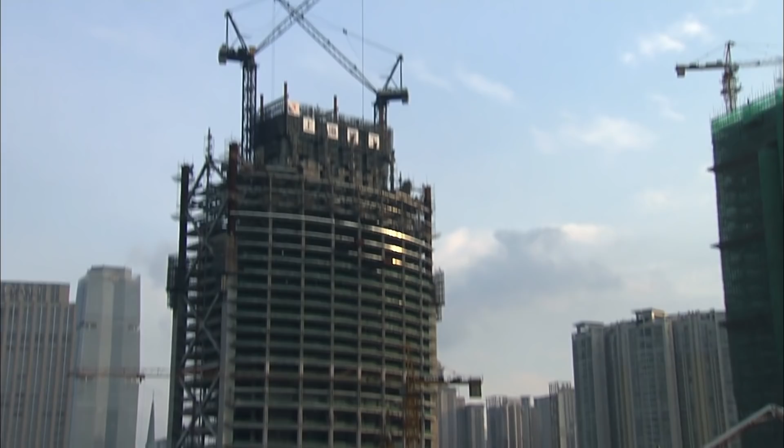In one of the world's most polluted countries rises a 71-story antidote: a tower designed to conserve energy, harness the wind and sun, and generate as much power as it uses. The builders call the Pearl River Tower the world's greenest skyscraper. If they succeed, they'll write the blueprint for the buildings of tomorrow. If they fail, they'll leave a towering mistake.

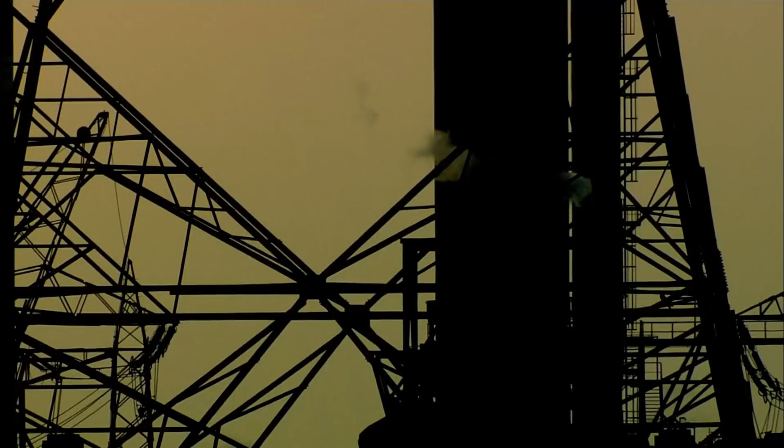Today, as oil reserves dry up, engineers and scientists are inventing other ways to power our cities: solar, geothermal energy, fusion, wind, and buildings that redefine the skyscraper. A new era of ecological engineering has arrived.

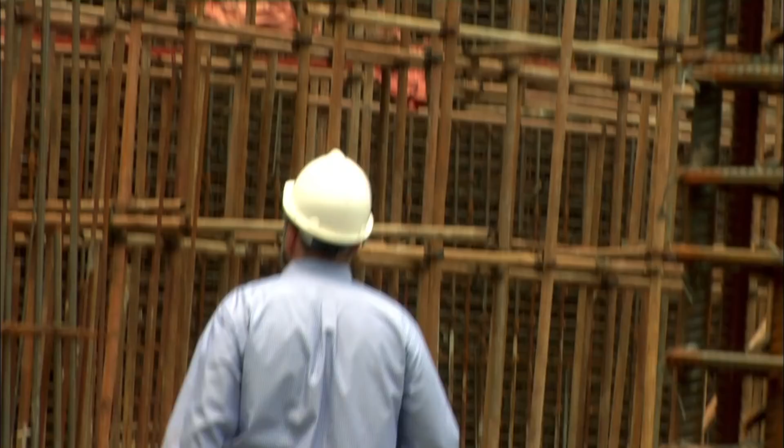40% of the world's energy goes into buildings for lighting, cooking, heating, and air conditioning, functions that not only gobble energy but release greenhouse gases. Architects are billing the Pearl River Tower as a giant antidote. At 71 stories, it will become the second tallest building in the city of Guangzhou, in the southeast of China.

The tower is just one of many buildings under construction. A city hungry for development, Guangzhou typifies modern China, a place pressed for time.

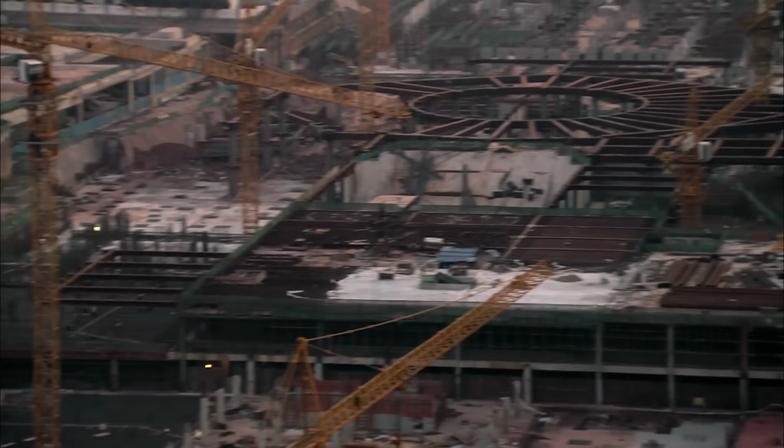The Pearl River Tower is part of the future Central Business District. When complete, it will take pride of place in this booming metropolis. For now, this whole area is a huge building site. All the work must be finished by 2010, when Guangzhou will host the Asian Games.

China intends the Pearl River Tower as a sign that the world's most polluting nation is starting to clean up its act. To build this ecological high-rise, four players have a key role.

Roger Frechette is the engineer in charge. He specializes in clean energy for buildings. If this ambitious project meets its goals, it will be Roger's greatest success. It's also his greatest risk.

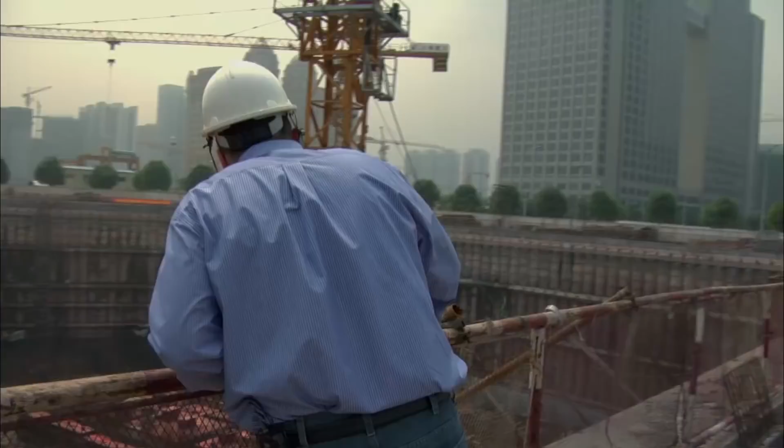It's really a very critical time in the history of the construction industry. The problems that the world sees right now with global warming and shortages of energy are forcing us to rethink how we design buildings and how we build buildings.

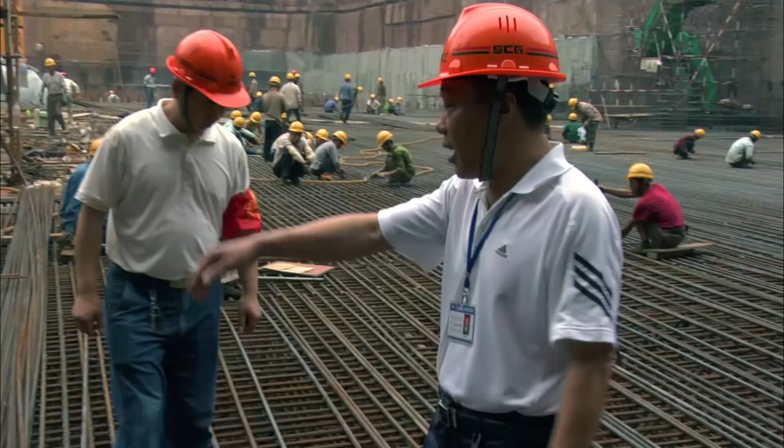Pan Xuanzhu and Xu Chaoshang work for the Shanghai Construction Group. They're in charge of every stage of the work and hundreds of Chinese workers. Whatever happens, they must stick to the tight construction schedule.

I've been doing this kind of work for 20 years. This is the biggest site I've worked on in my entire career.

It's also the boldest. The technology is new and untested. It's the first time that I've taken part in the construction of an ecological high-rise. There are a lot of difficulties and technical problems during the construction. For me, it's a huge challenge to manage the whole of the site.

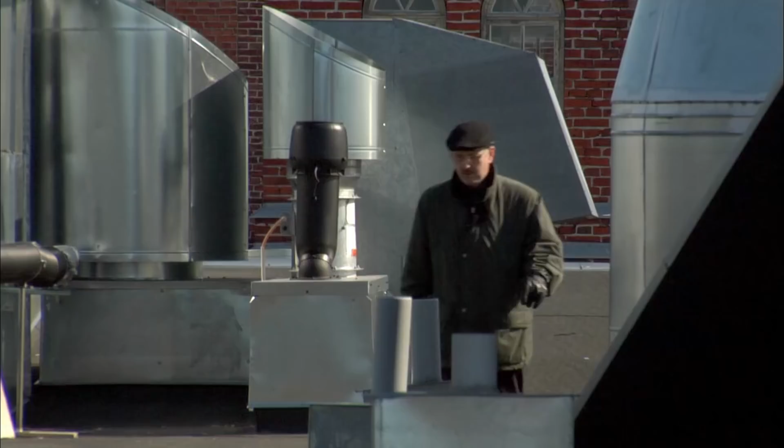And finally, standing by in Finland, Risto Joutsiniemi is far from the building site, but close to the project. He's the brains behind the huge wind turbines that are key to powering the Pearl River Tower. It is my dream to get the Earth going without polluting it, only make it really green.

Together, this international team of eco-engineers faces the challenge of a lifetime. The deadline is fixed. Whatever problems arise, they have 2.5 years to transform this hole into the world's most ecological skyscraper.

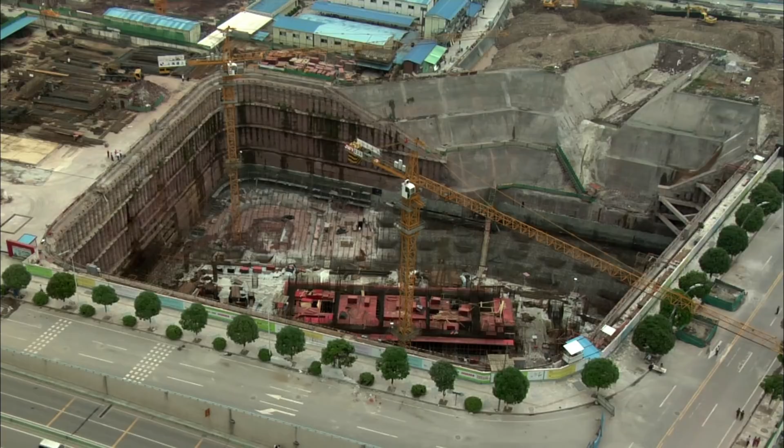Roger's firm, Skidmore, Owings & Merrill, knows all about building skyscrapers. In the past 70 years, they've completed more than 10,000 projects in more than 50 countries, but nothing like this: a building that taps the wind and the sun to produce as much energy as it uses, a building that curbs pollution instead of creating it.

Buildings may seem inoffensive, but Roger knows they're a huge source of greenhouse gases. When we think about the problems of global warming and carbon emissions, most people think about cars and buses and transportation and factories. But the reality of it is that there's more carbon emissions that come from office buildings and residential buildings than from those other sectors.

Well, in this decade, China will become the largest user of fossil fuels on the planet. But for the first time, China is realizing that their own natural resources are limited, and they need to find ways to reduce the amount of energy that they consume. So how people use buildings, how people survive within buildings is going to be very important to our future.

Roger is making his first visit to the construction site, where work will hum for the next 2.5 years. On this spot, his dream will come to life: a revolutionary skyscraper, integrated into its environment to tap clean energy.

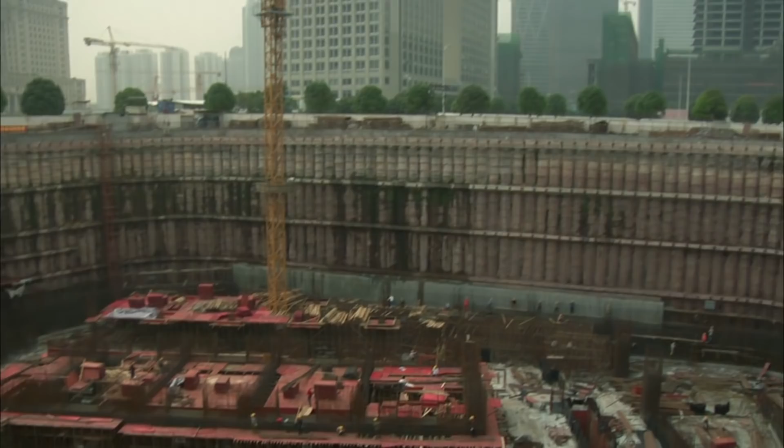Site of the Pearl River Tower. Off to the right here is the hole. Right now, the project is still well below grade. The hole is about 28 meters deep. When the project is complete, it'll rise roughly 309 meters into the air. To put that into perspective, this building off to my right is roughly 100 meters tall, so our project will be roughly 3 times that height.

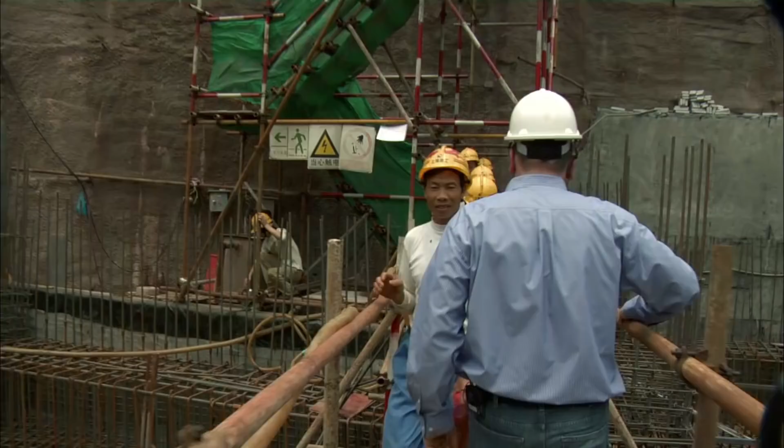Throughout construction, Roger will have to negotiate a slew of challenges: unforeseen setbacks, new techniques, cultural differences, and diplomatic solutions. Above all, looms an unyielding deadline.

The tower also has to guard against unseen forces. China is one of the world's most earthquake-prone countries, and Guangzhou itself lies near a major fault zone. For the tower, protection starts at the bottom. The tower is designed to withstand a quake measuring 6 on the Richter scale, almost as bad as the 1994 quake that rocked Northridge, California.

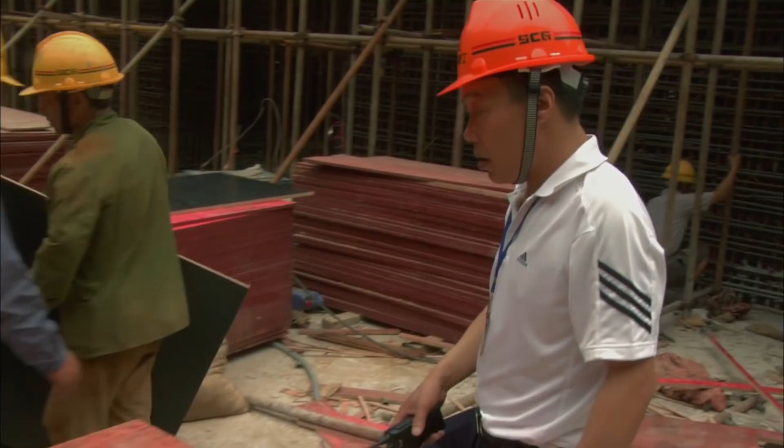Erecting the vital foundations is just one of 1,000 burdens for Pan Xuanzhu, the site's foreman. He supervises an army of welders, steelworkers, and crane operators. Pan Xuanzhu is the tower's linchpin, the link between the engineers in their offices and the teams on site.

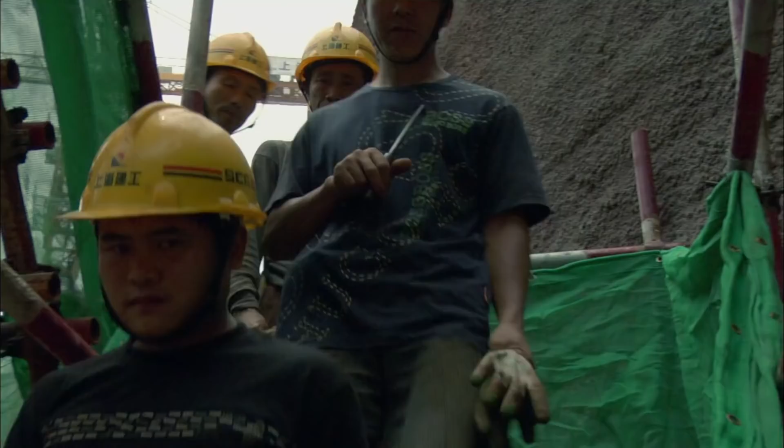My work goes like this: first of all, I have to establish plans for how to execute the job. Then I pass these plans on to the workers. Every day at midday, I go down to the site to look over the work myself and see if everything's been done the way it's supposed to. We have 500 workers on the construction site right now. Their tasks are well defined.

A professional team installs the cranes, and then there's a second team working on constructing the beams and putting the steel framework in place. Pan Xuanzhu makes sure the engineers' plans are followed to the letter. In this 3D jigsaw puzzle, one slight deviation could cost millions to fix.

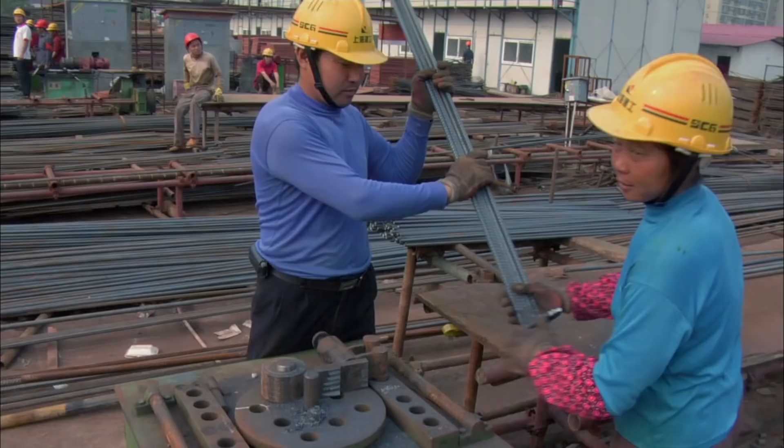This metal forest will safeguard the foundations against quakes. The ground may shake, but the tower won't budge. It's a labor-intensive part of the building process.

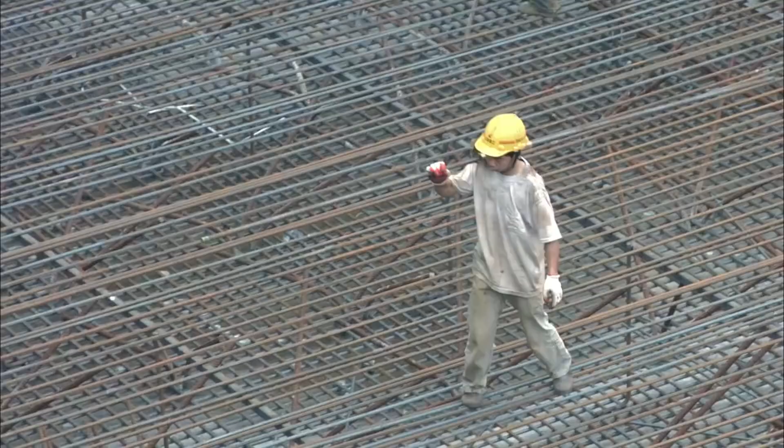Because the tower site is so complex, Roger Frechette visits regularly to brief the managers. He also checks the coordination between the specialty workers and makes sure work is advancing as planned.

But there's a hiccup, and Roger needs to meet with the local team to fix it. Some of the Chinese engineers are questioning the revolutionary ventilation system. They're wary of the new technology. It's a classic situation for Roger. He wages a constant battle to change habits in the world of construction, and language complicates every problem.

I think this is really important. I think that this is something that we really need to focus on, and I think time is short. And one of the real benefits of having a double wall is that we have the ability to isolate that hot air, that energy, and to pull it out of the building.

While Roger and his team aspire to revolutionize power consumption, the local engineers prefer their tried and tested methods. But I wanted to make you aware of our concern and why we are concerned about pulling this hot air through the chilled beam. To win them over, Roger must be diplomatic, but firm.

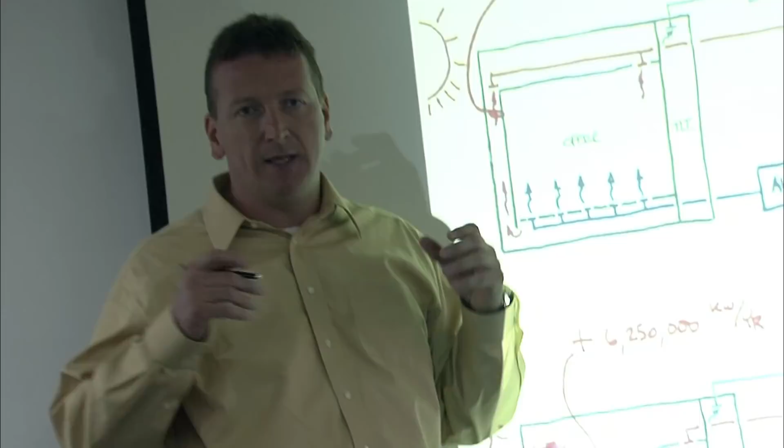A certain quantity of air has to be rejected. He can't yield if he wants to realize his dream: a building that generates all the energy it needs. No single solution exists. He requires a cocktail of skillful technology and ingenious design.

First, the very position of the tower is key to tapping two large sources of energy: the sun and the wind. The tower walls facing the sun are covered in photovoltaic cells, and the tower's aerodynamic shape attracts and accelerates the wind toward its four huge turbines.

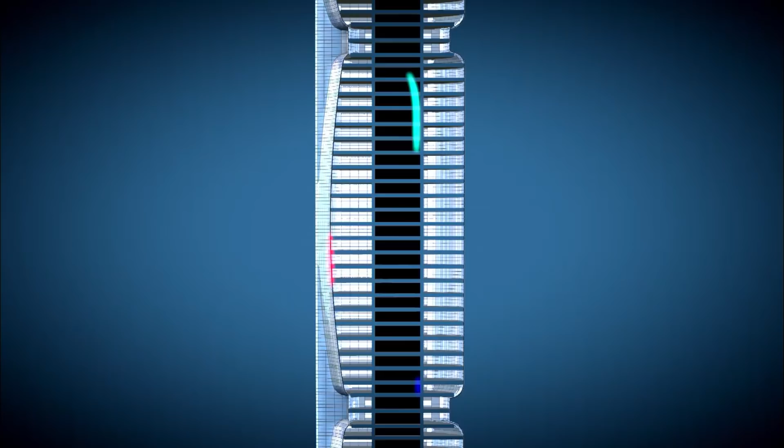Unlike most buildings, the tower will let in a flood of light to conserve electricity. At the same time, a protective layer on the facade will capture excess heat from the sun to keep the interior cool, without relying on energy-guzzling air conditioning. It's this combination of technologies that makes the Pearl River Tower the first of its kind.

Roger returns to his office in Chicago and hopes that the local team has fully understood what he has told them.

The engineers' qualms have caused delays. The deadline is a mere 18 months away. Although the core of the tower has passed ground level, the basement floors still aren't finished.

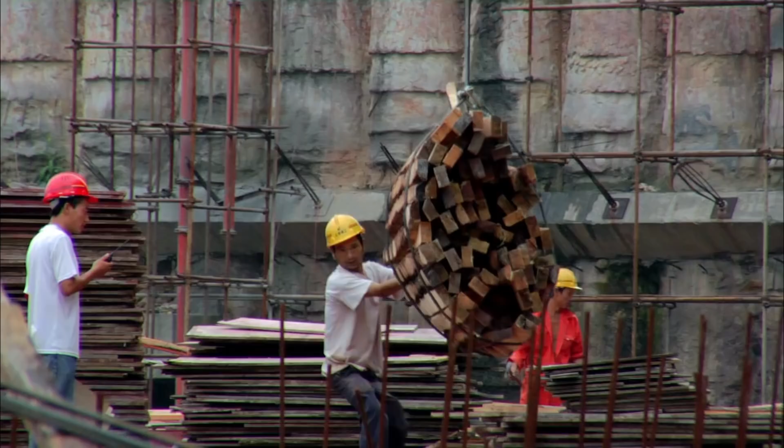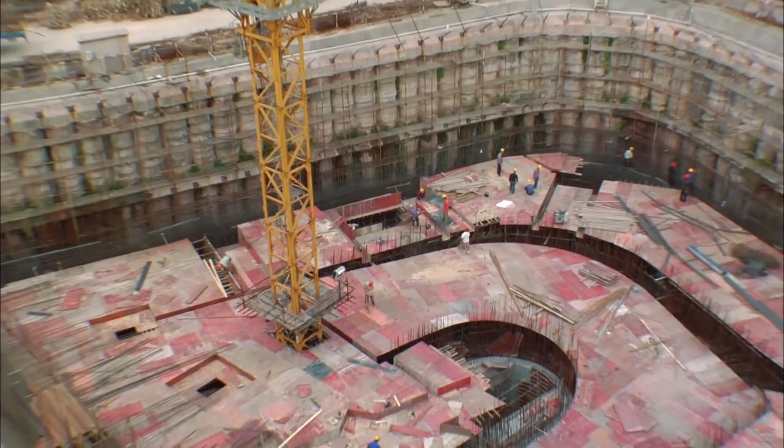The site is as busy as an anthill. Workers measure thousands of planks, which will form a temporary mold for each of the concrete floors. Steelworkers will then construct the metal structure to support the reinforced concrete. A whole floor takes shape, and the process will be repeated 71 times until the tower is complete.

With an unyielding deadline, the management has to find a way to make up for lost time. Simple: work into the night while the rest of the city unwinds.

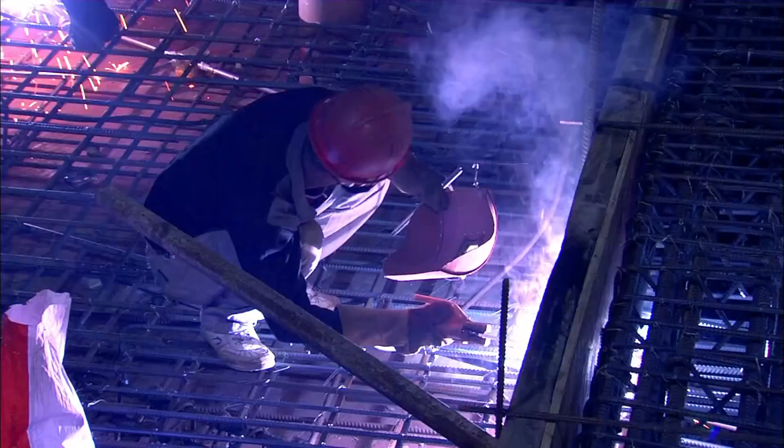Xu Chaosheng is brought in to get the work back on track. The weight of the skyscraper now rests on his shoulders.

It's also a chance to shine by pioneering time-saving techniques. He puts his ideas to the test at once.

Today, we're mostly working on pouring the concrete in the East Zone. It takes about 30 workers. By this evening, we will have poured 1,000 cubic meters of concrete. In the other zones, we're building the metal structure so we can be ready for the concrete there.

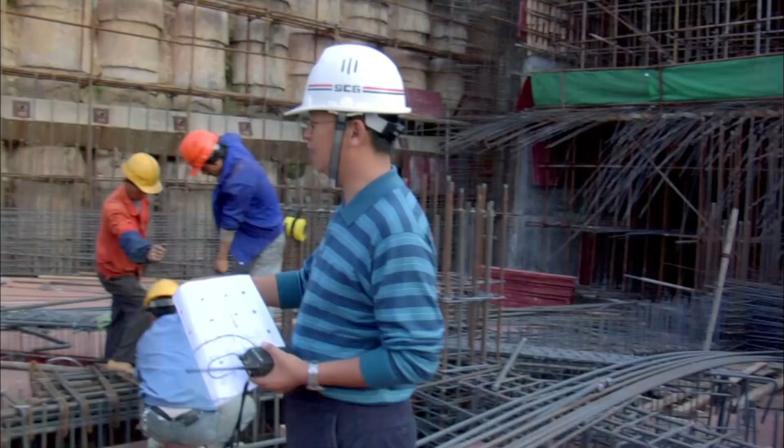Xu decides to pour concrete for one vast area rather than pouring it in smaller sections. If it works, he'll save precious time. Xu's move is bold. It allows no room for error.

The vast operation begins. More than 1,000 cubic meters of concrete are about to be poured, the equivalent of 50 cement mixer trucks. Weeks of sweat will be tested in just minutes.

Everyone's gearing up. Tension mounts between the bosses and the workers.

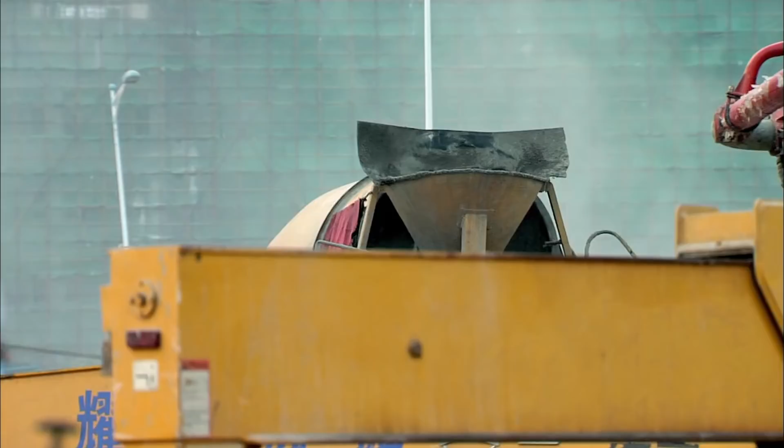It takes a huge amount of coordination to organize the arrival of the mixers, pinpoint where to pour the concrete, and spread it properly. The construction supervisors are under pressure.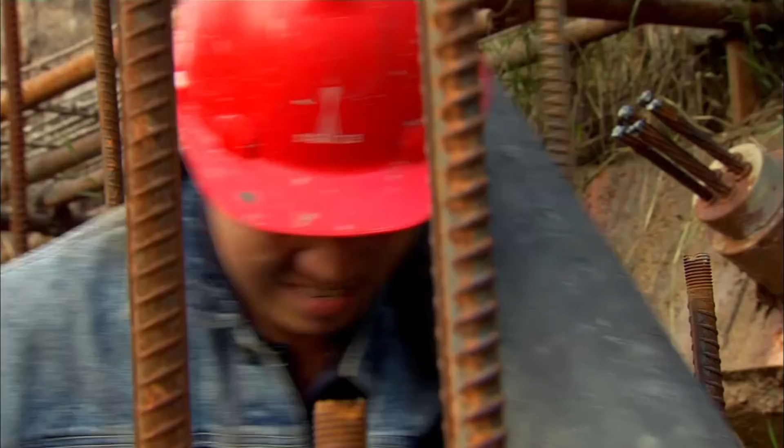The process requires teams of laborers, intense concentration, brute strength, close supervision, and long hours without a break.

As each load is pumped in, the floor begins to take shape. If the structure is poorly made, the concrete will pour into the wrong place. Then all work must stop while they make urgent repairs, with a slew of repercussions: workers placed on standby, cement mixers sent back, and a chain reaction of delays across the site.

If parts of the steel structure are missing, a weak point will be created that won't be detected once it's covered in concrete.

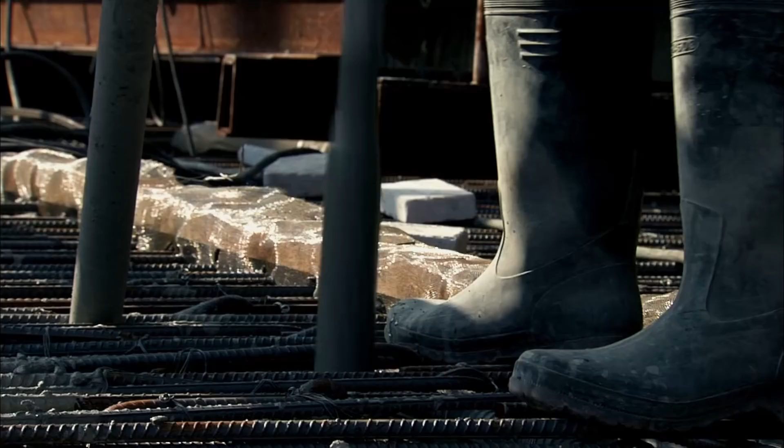By the end of the day, success.

At the other side of the site, teams of steelworkers continue non-stop. In less than a week, it will be their turn to have concrete poured. In all, it will take more than 3,000 cement mixer loads to build the tower's foundations.

The site managers check all the team's work and study the engineers' plans in detail before giving the orders for the day.

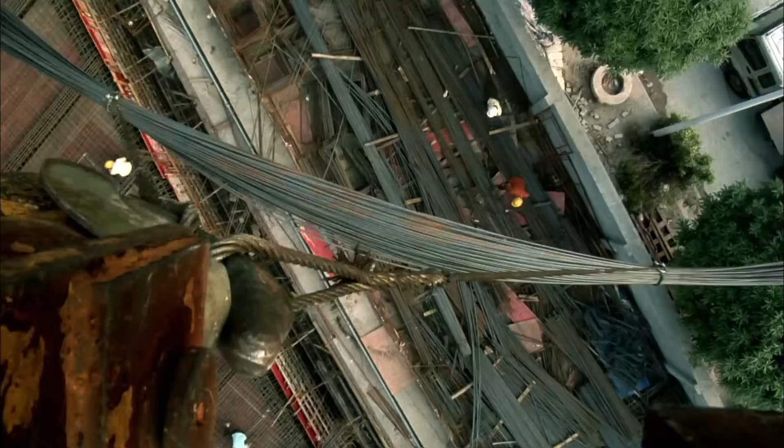Tons of steel rods are received and positioned according to the blueprints. At every step, surveyors watch for the slightest deviation from the plans. The tower is rising above ground, but work continues in the foundations down in the bowels of the building.

Not all challenges on the site take the form of concrete and steel. Some are flesh and blood.

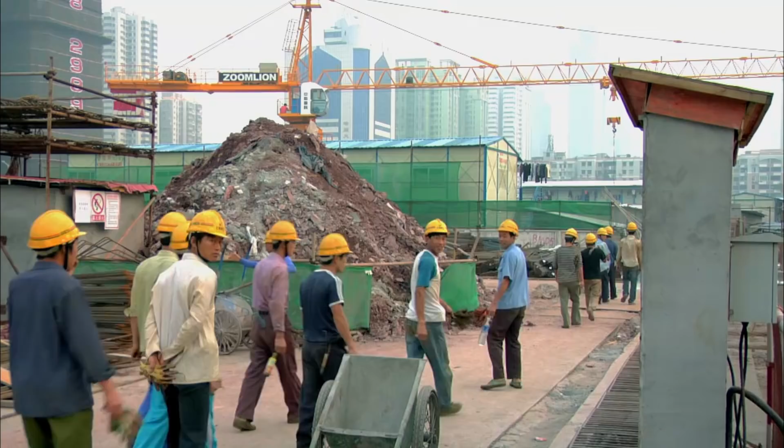Xu has had to recruit more workers to stay on schedule. The workforce hails from all over China.

Most come from Shanghai, a city over 700 miles away. Others left homes even farther away.

Their lives now revolve around the building site. Co-workers have become family. The site has become home.

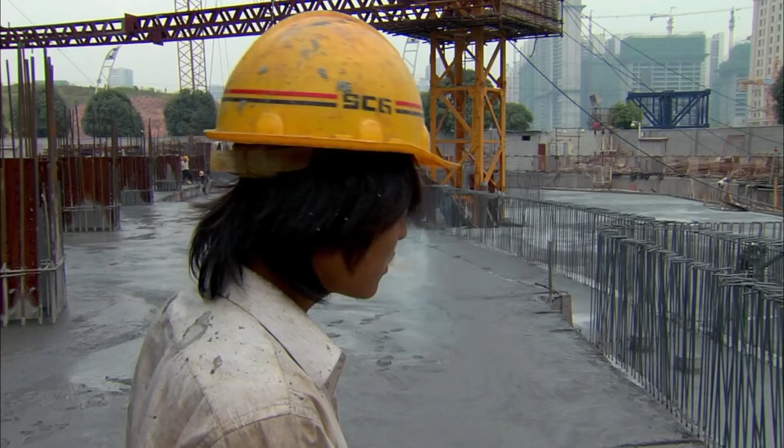In a vast country like this, there's no common language. China speaks more than 100 dialects. Dozens are spoken here alone.

Mandarin, one of China's 7 major languages, is used to communicate key information. No time for misunderstandings here.

Clarity counts, and for the clearest vision of the site itself, you need another perspective: a view from the tallest building in Guangzhou, the TV tower.

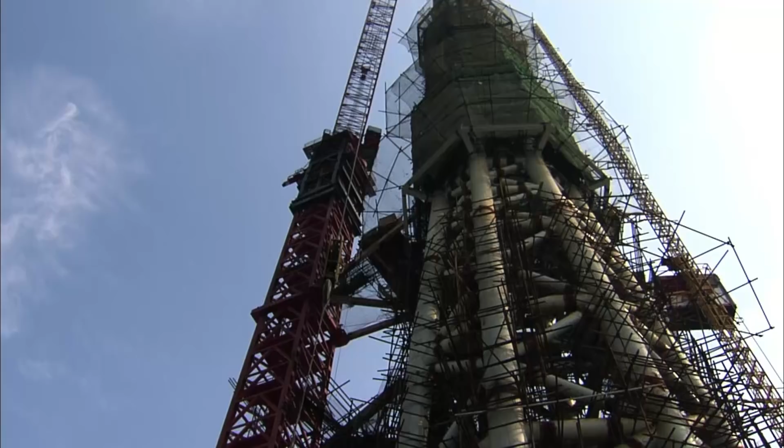From this height, Roger can show how location will shape the ability to generate power. It's very important in the design of the Pearl River Tower that we take into consideration the context, the physical context and the environmental context.

The Pearl River Tower is going to be built along a central axis for the new central business district in the Newtown area of Guangzhou.

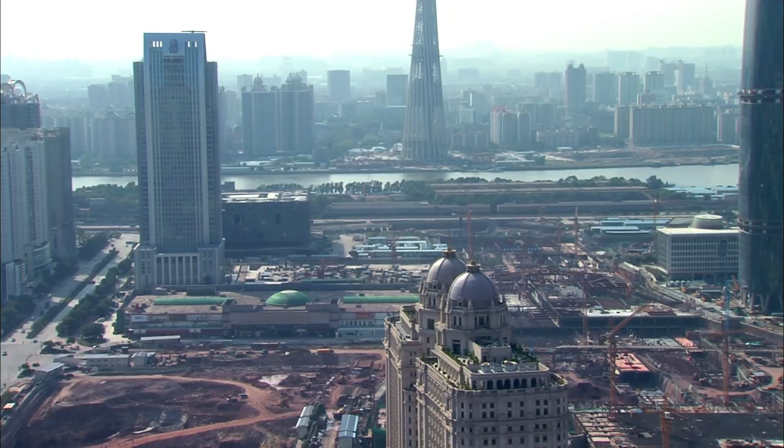The building will be located on the northwest corner, and in this location, the building will have uninterrupted access to sunshine through most of the day.

As the sun rotates through the sky, we have this great park that will sit in front of the building that will not block the sunshine that will come in contact with it.

By carefully angling the skyscraper, the architects will fully exploit solar energy. The sun's rays are strongest on the south and east.

Photovoltaic cells will be integrated into the building's external shading system to provide electricity, but also to protect workers from excess solar radiation. But the other thing that happens is the prevailing winds in Guangzhou for most of the year are coming from the south.

And as these winds pass through this new central business district, there will be no other buildings blocking this wind before they come in contact with the Pearl River Tower.

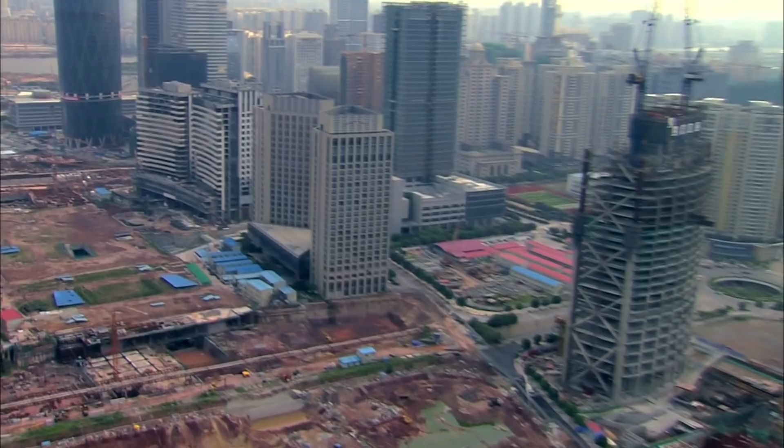So the winds will hit the turbines, and they will be the first thing that the wind sees.

But between absorption of wind and absorption of sunlight, these energy streams will be turned into power, and this power will be what helps to drive the building.

But at the site, the building is far from finished. Xu is installing a new crane to speed things up.

Yesterday, we finished installing this large blue crane, which is 54 meters tall. It will be used for lifting big girders like this one. It can lift a maximum of 64 tons. That's enough for all our needs.

It's special because it can rise up as the tower rises. In other words, its height of 54 meters doesn't change, but it can rise with the tower.

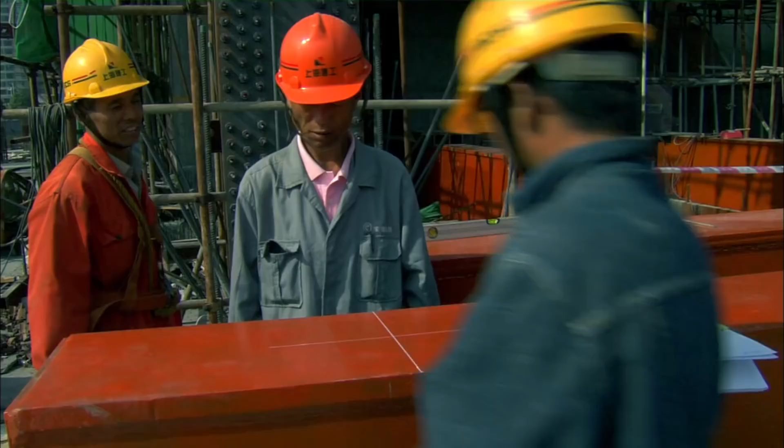Now we're going to test it by having it lift this 20-ton girder. This test is supervised by a team from the government in order to validate it.

If the test fails, the time can't be replaced. But Xu might be. After we've lifted the girder, we'll do a multi-directional test of the crane.

After that test, we can be completely confident about this crane. We'll know it can finish all the work we need it to do.

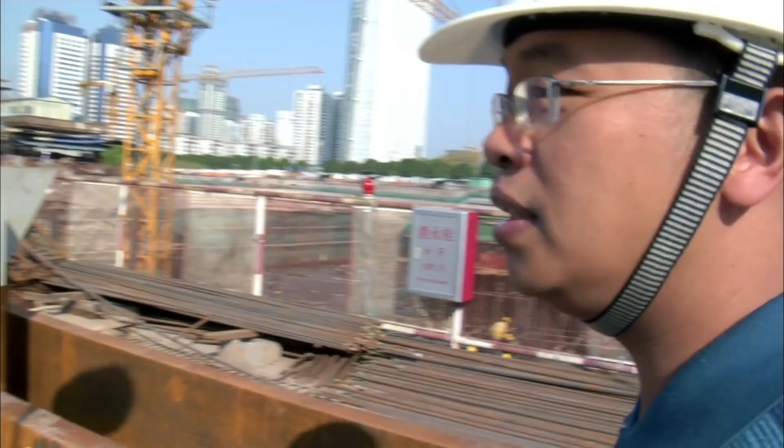Everyone's on standby till the results come in. The crane passes with flying colors. Now it can start hefting all their loads and make construction fly.

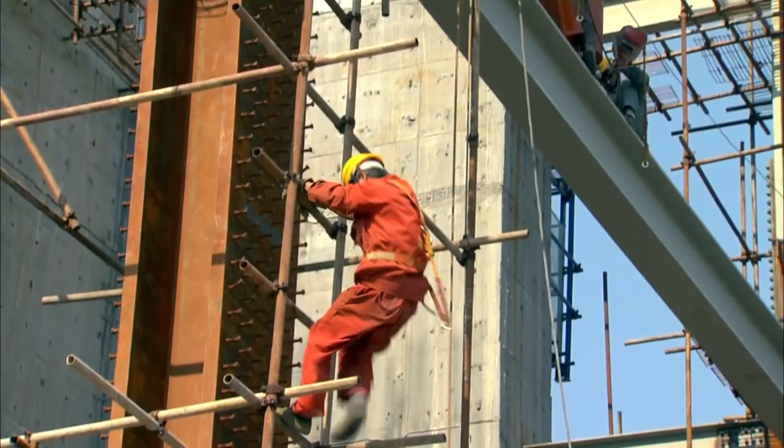Within weeks, the core of the tower reaches 40 meters, 130 feet. To work at these heights takes the construction equivalent of trapeze artists. They're called steeplejacks. They'll erect the steel frame that surrounds the core and supports the extremities of the higher floors. Their best friend, the safety rope.

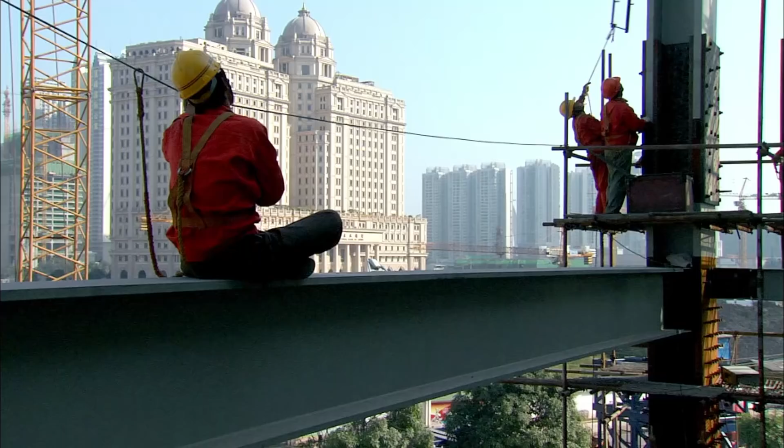Although the steeplejacks are all qualified climbers, the work is risky. These guys require a combination of daring and caution. A tool dropped from these heights could kill.

To maintain the tower's balance, steel girders weighing more than 10 tons must be precisely positioned. Since the crane operator can't see so far, the steeplejacks talk each girder into place. They'll bolt, weld, and if necessary, adjust the girders. No room for vertigo here.

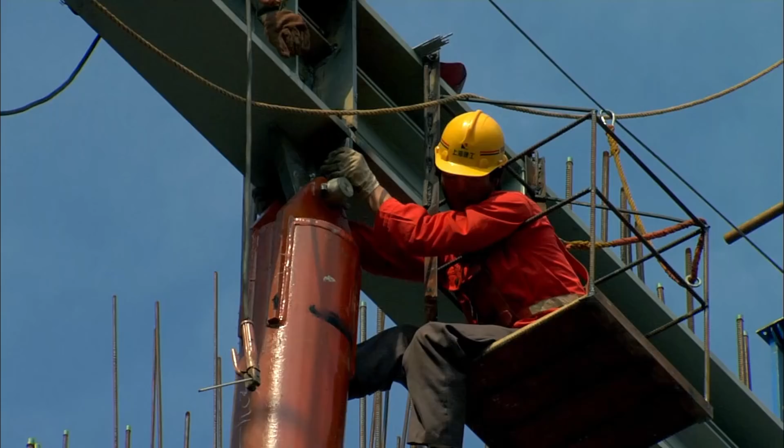Steeplejacks, steelworkers, concrete. Work has been going full steam for a year now. Next comes a huge step. This is a critical point in the work on the core. We're about to install our self-climbing scaffolding system.

Using this system, we'll be able to take away the scaffolding. The support sockets are already installed here, where the self-climbing system will be attached, and it's almost all assembled at the bottom. This system is the only one of its kind in China.

Along with the crane, Xu hopes it will help keep construction on schedule. After all that, we'll be able to do all our work on the core using this automatic system, which is controlled by computers. So from that point, we'll be much more efficient.

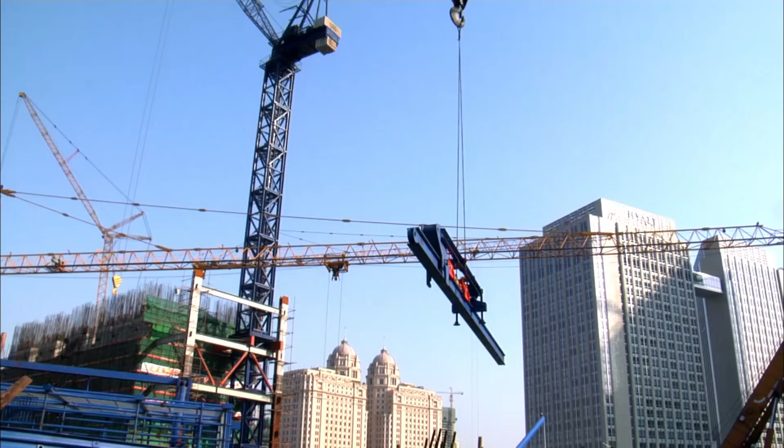We'll go from taking 12 days for each floor to 4 or 5 days. And at that speed, we'll be able to build the core to a height of 300 meters in 8 months as planned.

In a nation of 1 billion people, Sheng Xingwan is unique. He's a specialist in this kind of system.

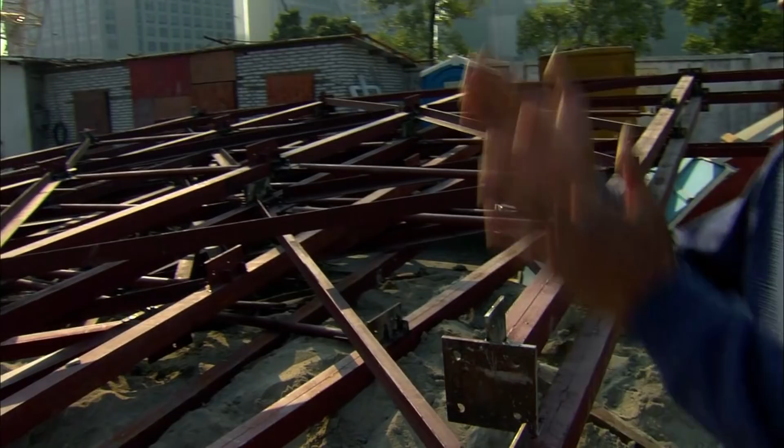So these are the support frames for up there. We'll fix them in place by bolting them. We can also suspend a platform inside the core, where the workers can work and advance on the building of the tower.

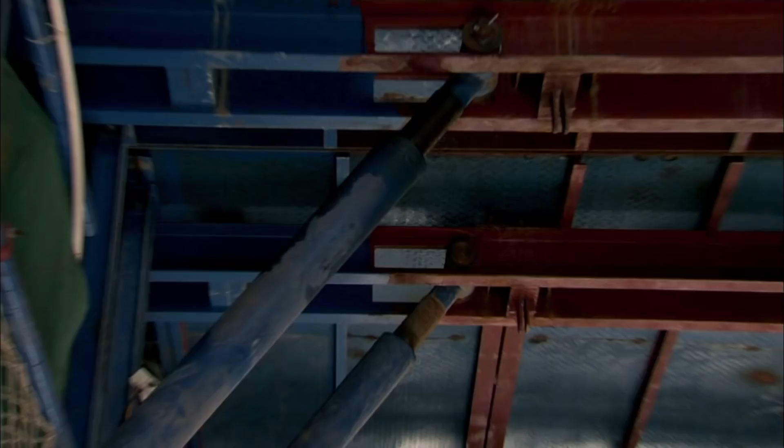What we're making is a kind of interior scaffold that can change shape depending on the structure of the building. When we pour the concrete for this wall, the shoring will rise automatically in accordance with the building, using the hydraulic jack system.

For example, if the floor is 3.5 meters high, the platform can rise up 3.5 meters to start work on the next floor to be constructed. So the workers can then start working on the steel frame and place the shoring before pouring the concrete, and so on and so forth.

We'll climb like that up to 300 meters. That's the process.

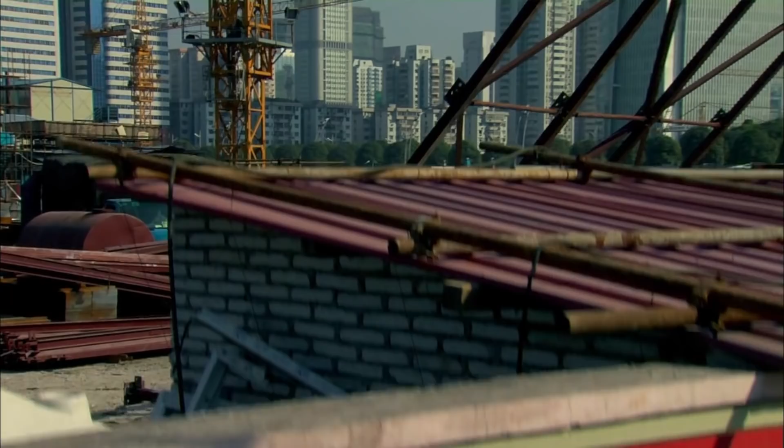It's a big day for Sheng. He has to coordinate the installation of all the platforms inside the central core and the blue structures on the outside, so crews can work safely without scaffolding. If all goes well, the backbone of the Pearl River Tower will start to take shape at 1 meter a day.

This Leviathan can manipulate these mammoth components with the precision of a surgeon's scalpel. Sheng guides each section into place by keeping in constant contact with the crane operator.

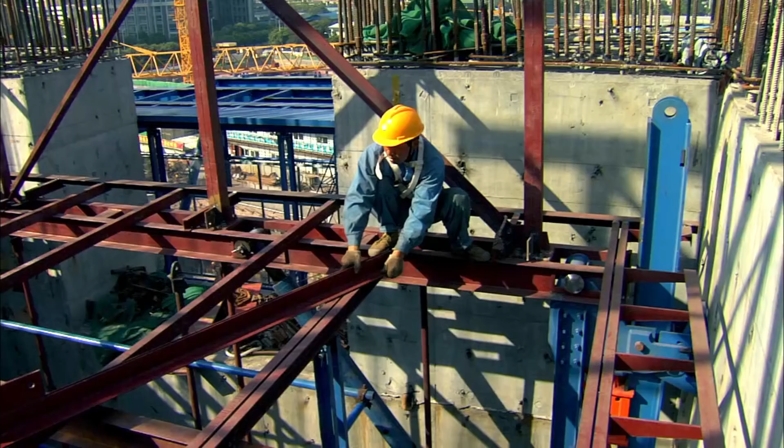At the same time, teams are assembling the platforms so work can continue as soon as the self-climbing scaffolding is in place.

With his innovative ideas, Xu has recouped lost time. Construction moves at full speed. Now the tower can be seen from a distance, standing 100 meters tall, almost 1/3 of its eventual height.

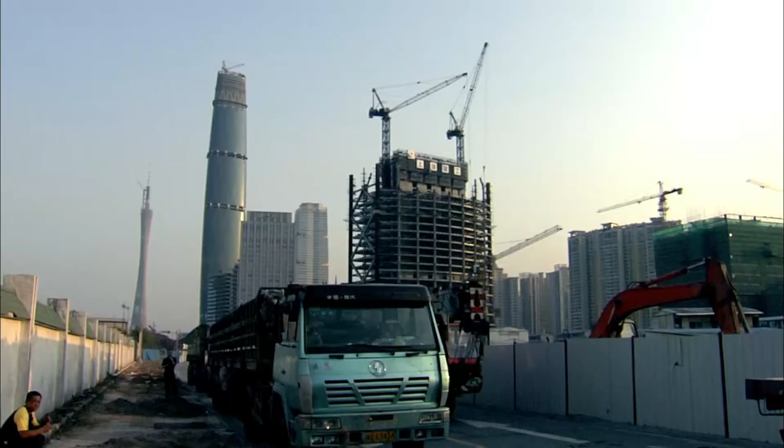Girder by girder, the skeleton takes shape. As the framework rises, the floors follow close behind. And Xu has more tricks up his sleeve.

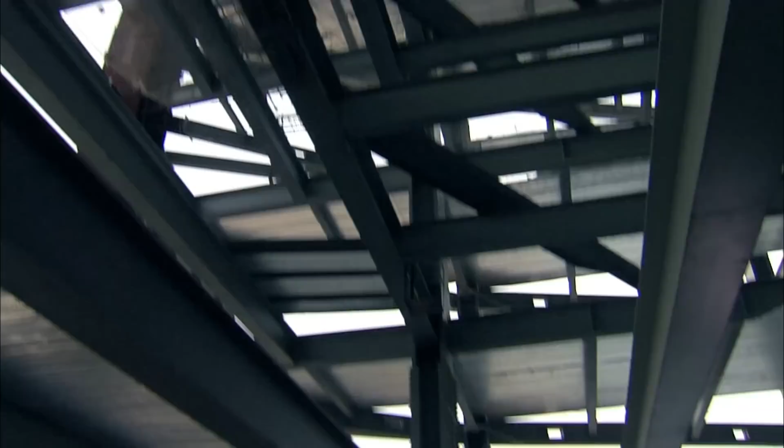For the floors, we use a very advanced technique. It's already used in Europe, and we've adapted it and improved it for our local needs. The biggest advantage of this galvanized steel floor is its system with no supports.

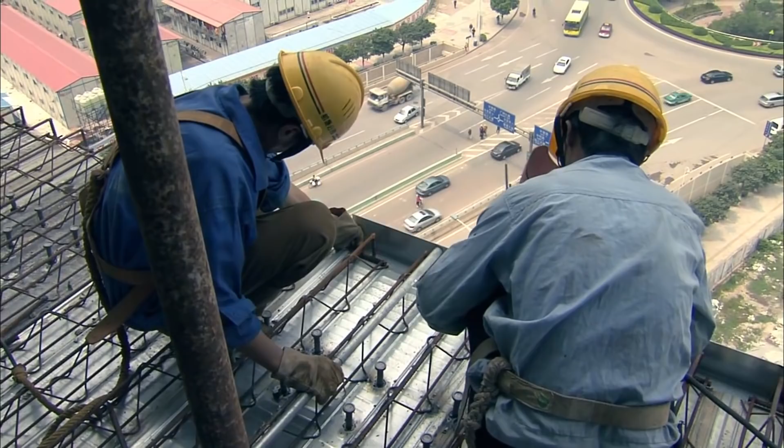The progress impresses a visitor, architect Roger Frechette. Barely a year has passed since he first came to the site. It's gone from a hole in the ground to a vision in the sky, the green workspace of tomorrow.

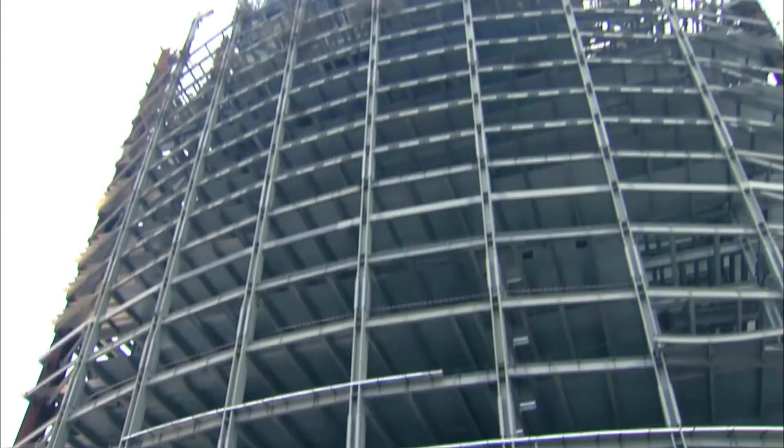This is what will be a typical office floor within the building. And if you can imagine, about 1 year from today, what you'll see is a couple things. One, you'll see a floor system, and the breathing air for the building will come up from underneath your feet. It'll come from the floor, and it'll rise up with natural buoyancy of air through the breathing zone, and that's how people will get their fresh air for the building.

What you'll see at the ceiling is there'll be a number of concave metal panels, and those panels will be cooled down, and at their cooler temperature there'll be a radiation exchange that happens between the panels and the people within the space. And this is what's going to make them feel comfortable.

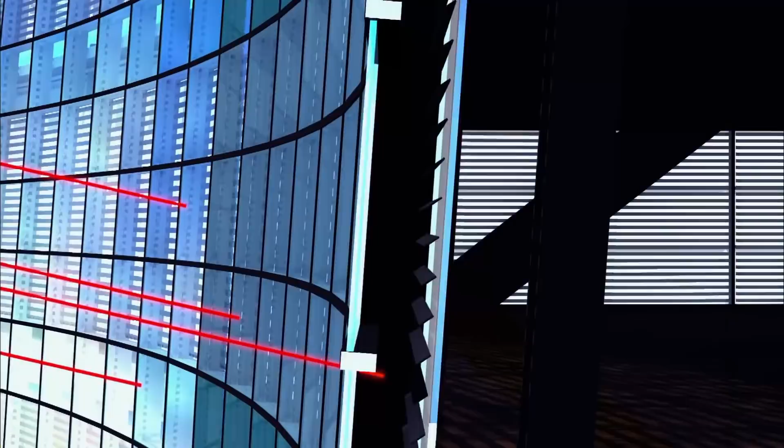When we go over to the perimeter of the building, what you'll see is there'll be what is known as an internally ventilated double wall facade. As the sun comes in contact with the skin, it heats up hot air within the layers of glass of this exterior wall. That hot air is then drawn up through the building, and we can use that hot air for other purposes. So air from the space will travel low into the exterior wall and will rise up between the layers of glass in the space.

And it is that air movement in the glass that causes a cooling of the glass and will help to maintain thermal comfort in the space. Now, hot air that is collected in that glass will be brought back to a technical floor, and we'll be able to reuse that energy elsewhere in the building.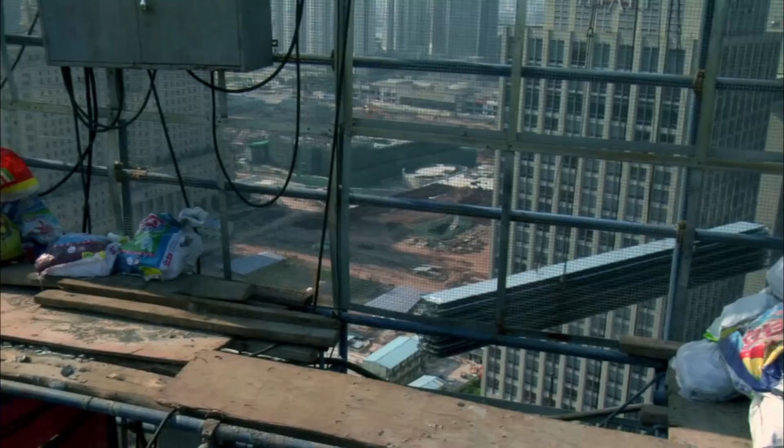Roger heads to the rooftop to review the work with Xu Chaosheng. For the moment, we've built up to the 22nd floor. That's where the wind turbine will be placed. A few days before, we were here, and the construction of each floor took about 12 days. However, we're getting faster and faster. Having built 10 floors, we can now build a floor in 3 days. So we're very confident about finishing the work at the end of the year.

This building will be one of the 4 highest buildings, with the TV tower behind and the Chongqing Square over there.

Where we are right now, the first mechanical level starts about 1 floor above us. And it's at that mechanical level that we'll have the wind turbines. You know, it's quite nice. When we were down on the ground, you couldn't feel any wind at all. But now you're up here, there's a nice breeze. You know, so I'm very excited. I think when these turbines are in place, they'll really do a good job. They'll be able to generate a lot of power.

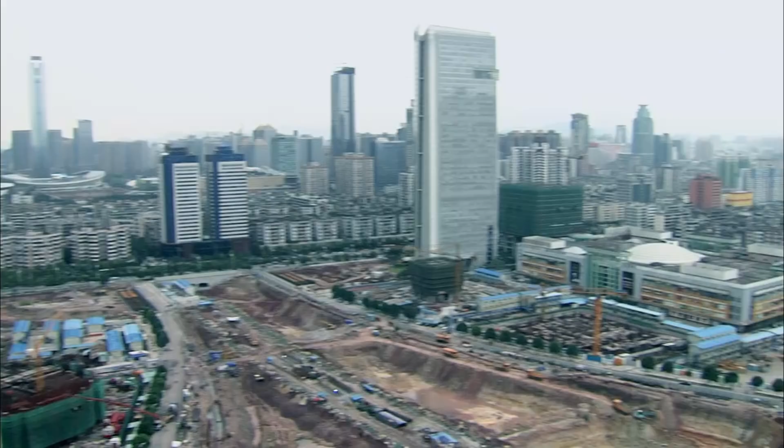But how do you insert a wind turbine, a notorious source of vibration and noise, inside an office building? Roger and his team had to go to Finland to find the solution.

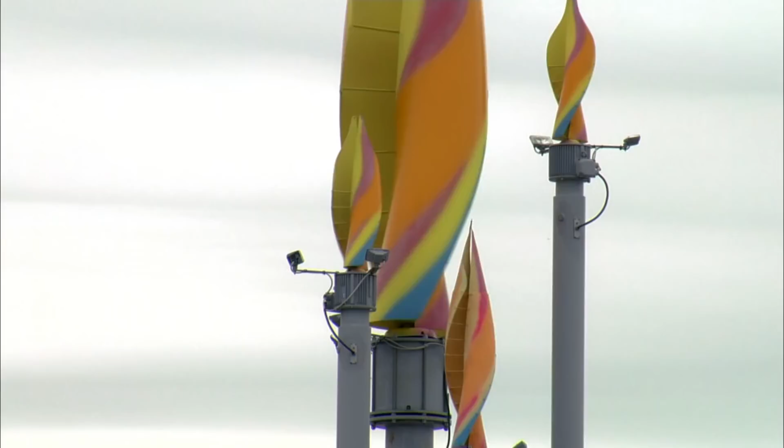In this Scandinavian country, where the sun appears for only half the year, inhabitants have tapped an alternative source of clean energy. As well as classic turbines, you find designs adapted to city life. No noise, not even vibrations. A jewel from the north, brought to the Pearl River Tower.

The man who pioneered vertical turbines in Finland is Risto Joutsiniemi. Risto's company, Windside, has the longest track record for making urban turbines. So the designers of the Pearl River Tower chose him to help build a new concept into the world of architecture and give their skyscraper a green advantage.

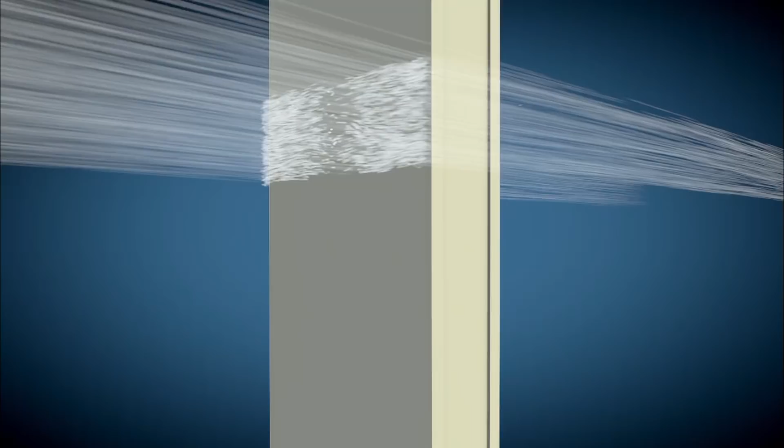This building is like a sail, so it means that it is very high wind pressure. Other buildings you build so that they are taking care of the wind, otherwise to try to get the wind away from the house. Here you are collecting it. We have here south, and on the other side we have the north, and the prevailing wind, the main wind, comes from the south.

On the turbine floors where air is funneled into tunnels, the Pearl River Tower taps a phenomenon of fluid dynamics called the Venturi effect. When the space narrows, the air particles accelerate. So the faster wind speed produced means more energy will be produced by the turbines.

The power production is also something we have records of in this kind of wind turbine. We can say it can be 1 kilowatt per square meter in this Pearl River Tower. When we apply this square meter power to our knowledge, we can do whatever. It's a very inspired project, very challenging and good for us.

Here's what I want to show you. This is a special windmill, approximately 1 meter wide and 4 meters high. This is the only windmill you can put in urban circumstances. It is totally soundless, very special, and you can put it wherever you want, even in the middle of town, as you can see.

If you have a propeller, you cannot put it on the roof of a house because there's a lot of noise. There is 0 decibels here. We are so near and you cannot hear anything. This is our specialty.

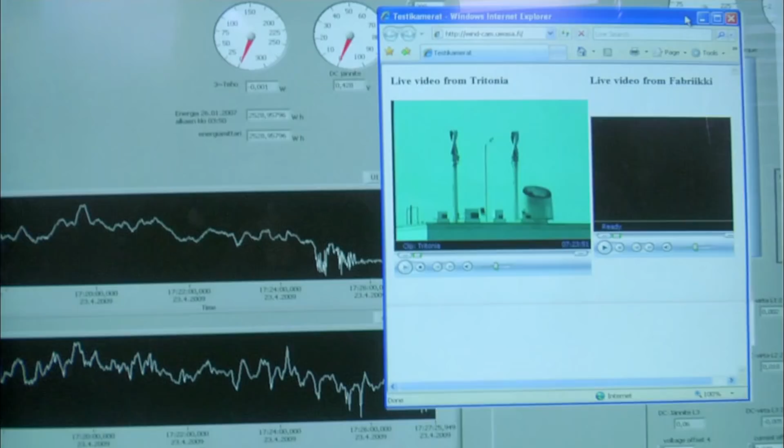Risto needs all this data to keep improving the system he created and to replicate this model at the Pearl River Tower.

This is what we try to do in China. We have 4 turbines and 4 monitors, and we can look from here what happens and what the production is in China. I think this can be a very beautiful cooperation with the university in the future.

At the building site, the floor that houses the turbines is about to be constructed. Here, the facade narrows down to the floor where the turbines will be installed.

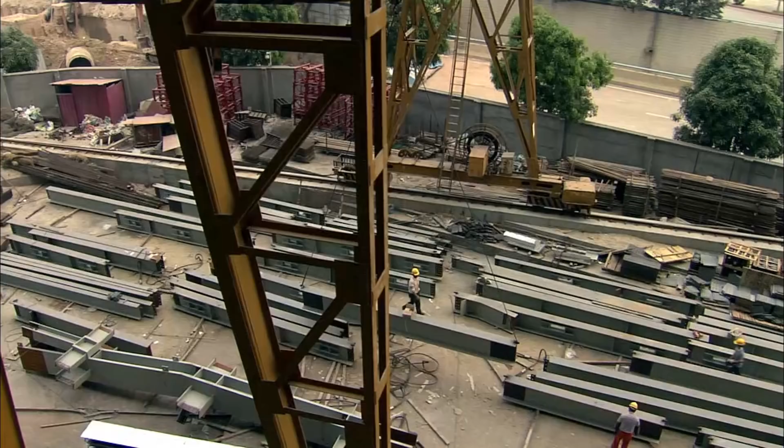At this height, architects have calculated the wind should accelerate by up to 250% before reaching the tunnel where the turbines are housed.

The curve is created using custom-shaped girders, perfect for the turbines, but a nightmare for the construction teams. They must be positioned with absolute precision, and fixed securely once in place, under Xu's eagle eye.

The last big girder for the turbine floor arrives. As with the others, just getting it off the ground is a headache.

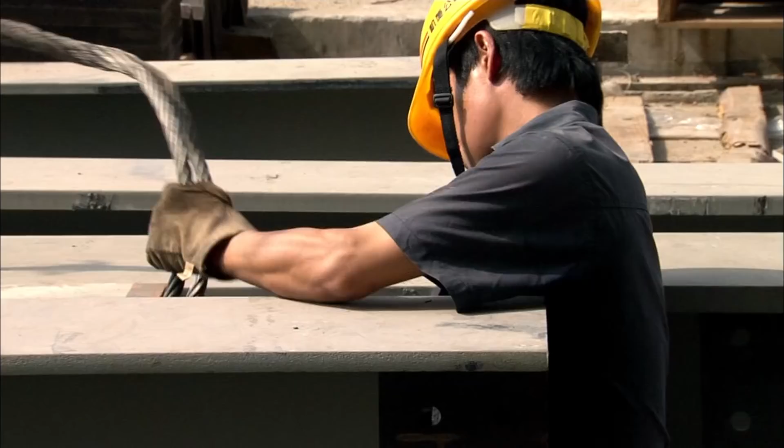This metal girder weighs about 21 tons. Its special, non-rectilinear shape gives us real problems for lifting. We really need to pay attention because it's very difficult to find its balancing point and work out its center of gravity in order to lift it properly. It's a dicey operation.

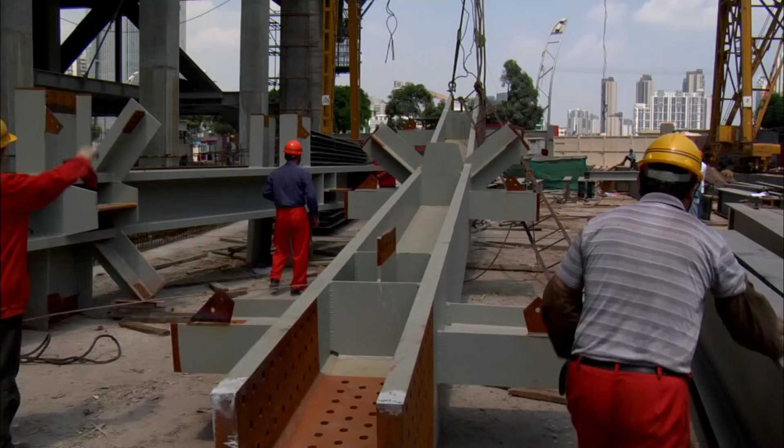In cutting-edge construction like this, each step has its complications. Almost the entire 19th floor has been built. All the girders are bolted and welded together. Total weight: 400 tons, equal to one jumbo jet full of passengers. Everything must be checked once and for all to detect any problems that could upset the schedule for the other floors.

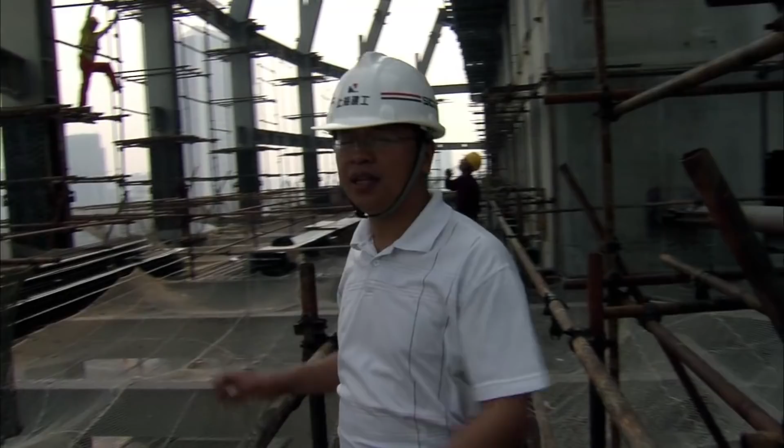Now we are lifting the girders for the construction of the 19th and 20th floors.

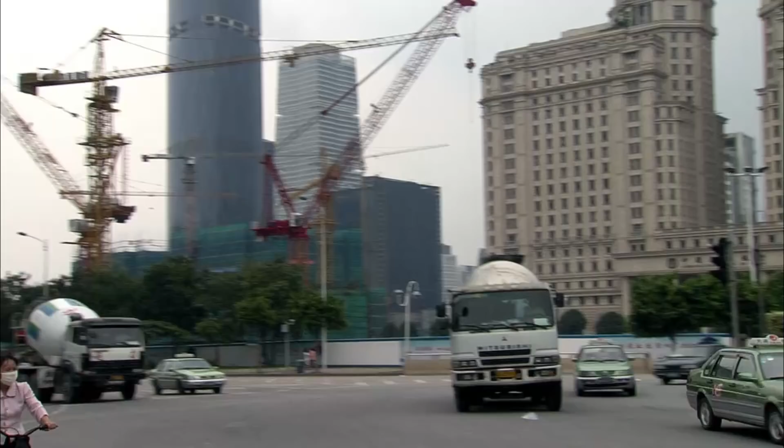For everyone, reaching the turbine floor is symbolic—a milestone not just for the tower, but the nation. Engineers, foremen, workers, everyone is working full out so the Pearl River Tower is completed before the Asian Games in Guangzhou. Whether they finish on time, they hope to meet a far bigger goal: planting China's first seed of clean energy.

This tower is the first real ecological building in China. It's the first time a skyscraper has brought together 11 ecological technologies that allow us to reduce our energy consumption. The ecological skyscraper is exactly what the Chinese government is aiming for. In fact, the current government wants to move more and more towards new technology and clean energy.

I'm very proud of this ecological building project. Nowadays, everyone in the world is worried about protecting the environment, and I think the ideas behind this project and this building are excellent.

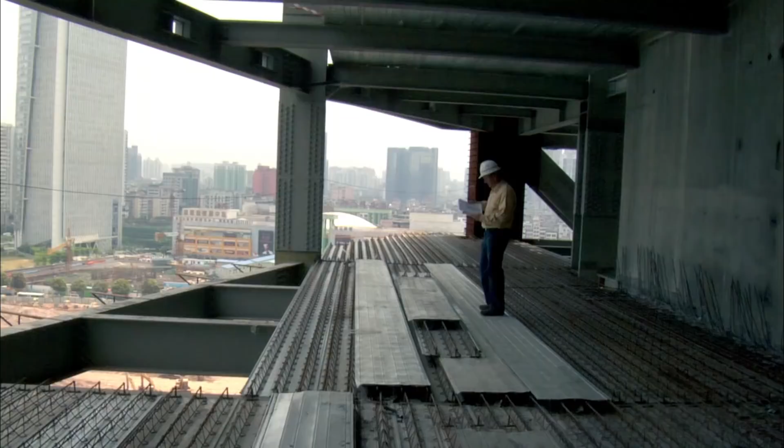I also hope this kind of ecological building will be used as a model for other buildings. The Pearl River Tower, I think, represents a big step forward in the science of sustainable buildings, and we're hoping it's something others will study, learn from, and carry forward.

Even unfinished, the Pearl River Tower marks a new era in architecture, when concrete, steel, and glass will all share the same color: green.